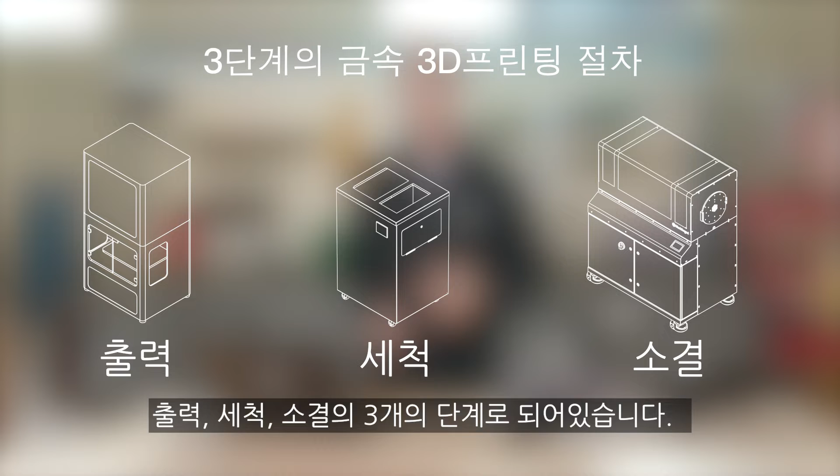First, let's start with CAD. You design your part, then export to STL and upload into Eiger. Eiger is a cloud-based slicing and print management system that comes with every Markforged product. This automatically configures your part based on the material and printer you've selected.

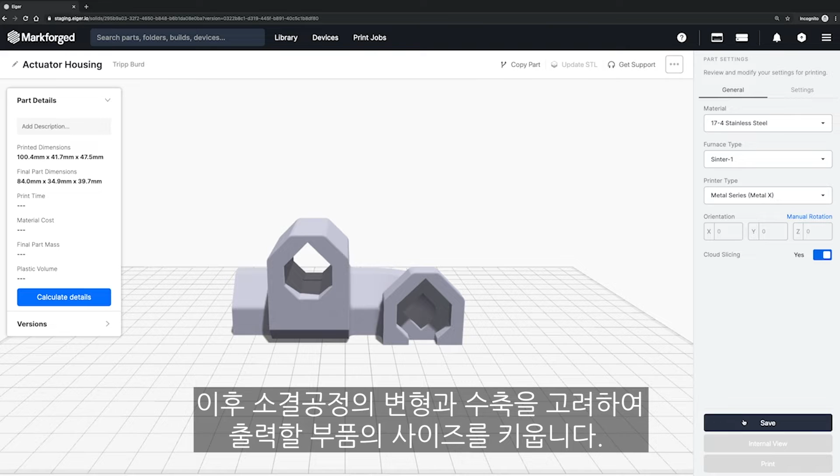When your part slices for metal 3D printing, it gets scaled up to account for shrink and deformation in the downstream processes. It then slices your part into discrete layers, identifies overhang features, and builds supports and a raft underneath your part. As we go through printing, washing, and sintering, Eiger will monitor the part's progress along the way. Let's start this print and go to the Metal X.

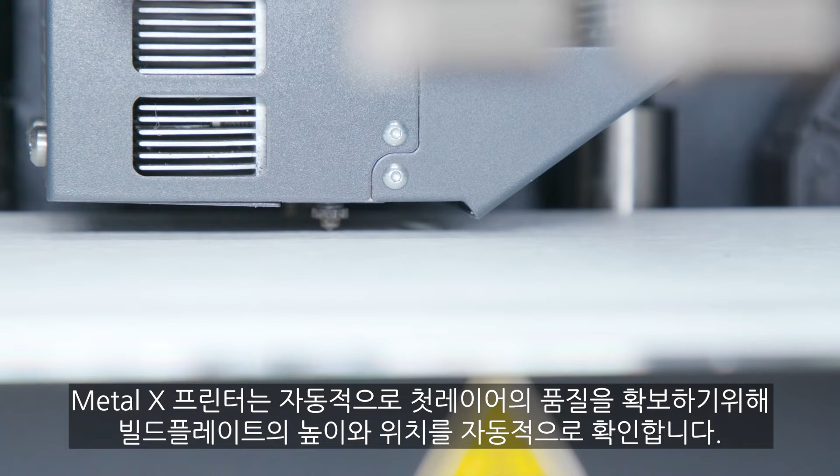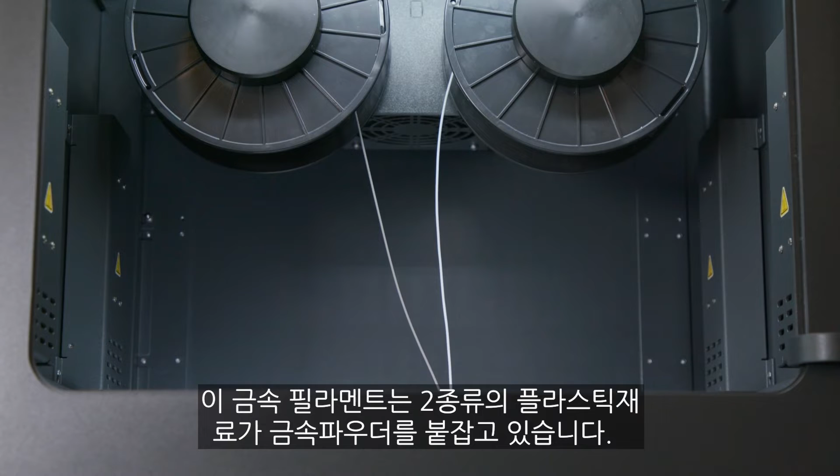Before starting a print, the machine automatically maps and levels the bed to ensure the first layer goes down well. Your print is built of 2 materials stored in this heated chamber above: one of ceramic release material and one of the metal to be printed. This filament material is metal powder safely suspended within a 2-part plastic binder. It gets heated and extruded onto the build plate where the part is created layer by layer.

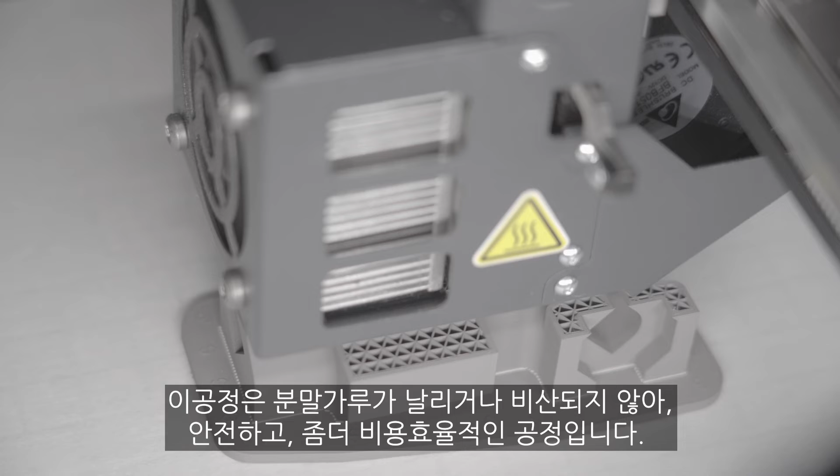The release material gets extruded as an interface between the part and its supports, so that once your part comes out of the furnace, it's easy to remove. Unlike other metal 3D printing systems, this process does not require loose metal powder, resulting in a safer and more cost-efficient workflow. 17-4 stainless steel is loaded now. However, with a quick changeover, the system is capable of printing in stainless steels, tool steels, coppers, Inconel, along with several other materials currently in development.

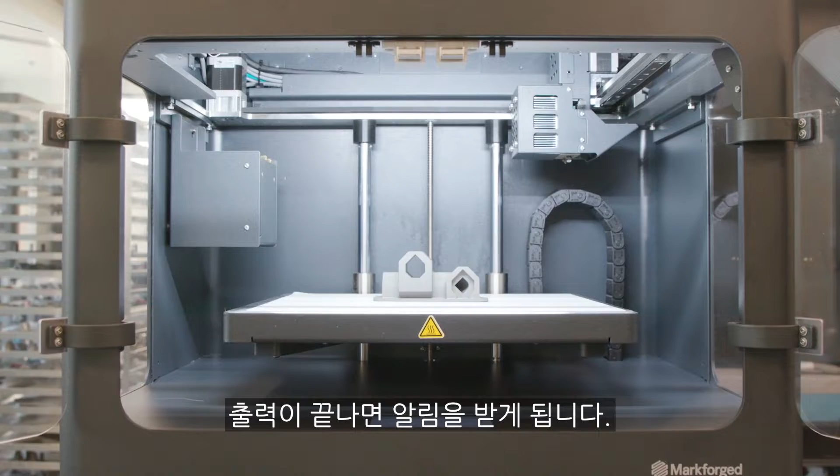Once your part is finished printing, you'll get a notification. At this point, you can go to the printer, remove the part from the build tray, and clear the bed. Now we have what's called a green part. It doesn't really look or feel like metal. However, a large part of it is comprised of metal powder. Next step will be putting it into Wash 1 for the debind process.

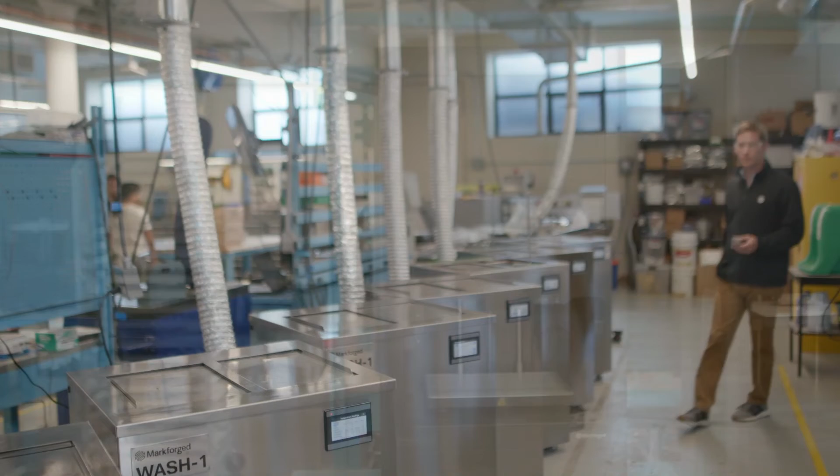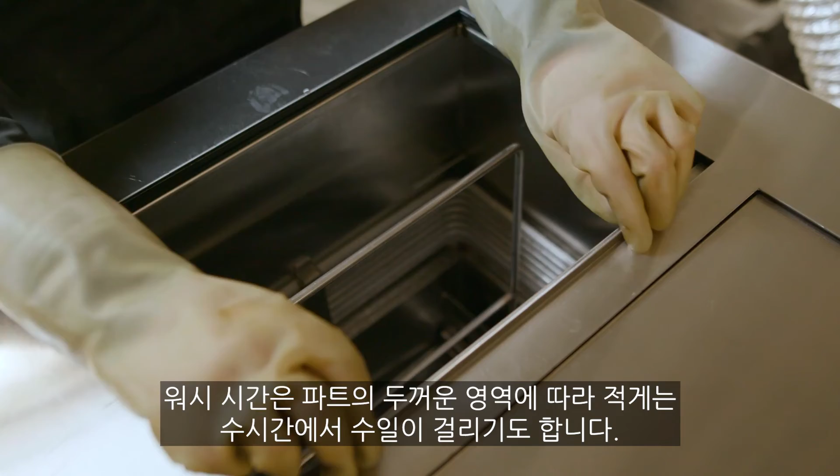The Wash 1 removes the first stage of the binding material. A green part is taken from the printer and placed into the wash basket, which is then lowered into the solvent. Wash times will vary, ranging from a few hours to a few days, depending on the thickest region of your part. After that, it's now called a brown part and is ready for sintering. Let's go over to the furnaces.

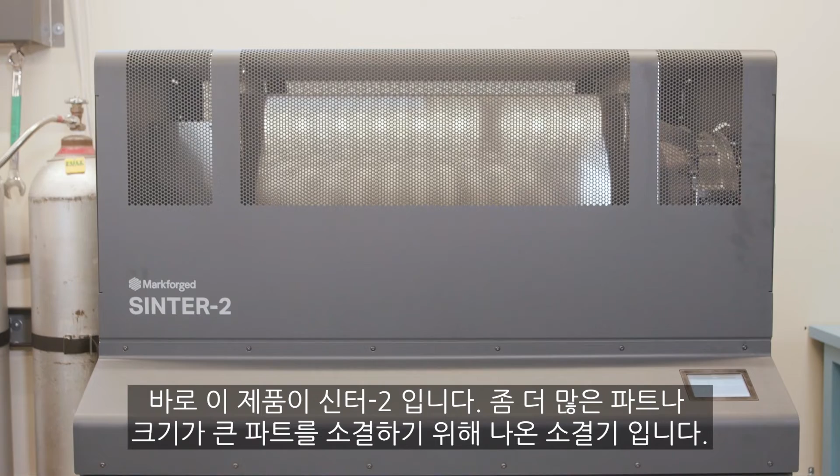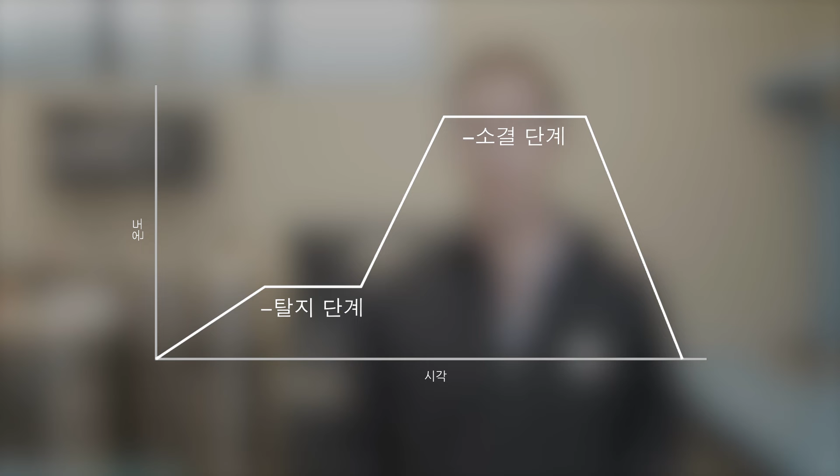This is Sinter 2, a furnace designed for mid-volume production runs and larger printed parts. Sintering transforms a print from a lightly bound collection of metal powder to a fully finished metal part. First, the temperature ramps slowly to burn away the trace amounts of remaining binding material. Then, temperature ramps closer to the melting point of the material, allowing metal particles to start to fuse together to create a strong metal part.

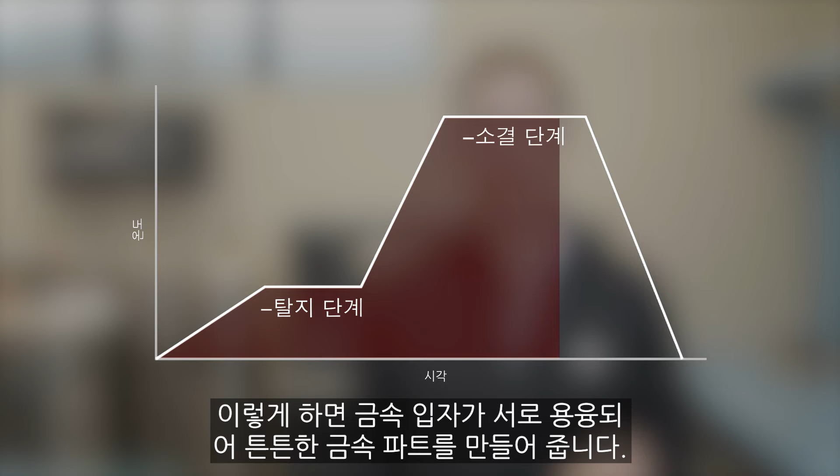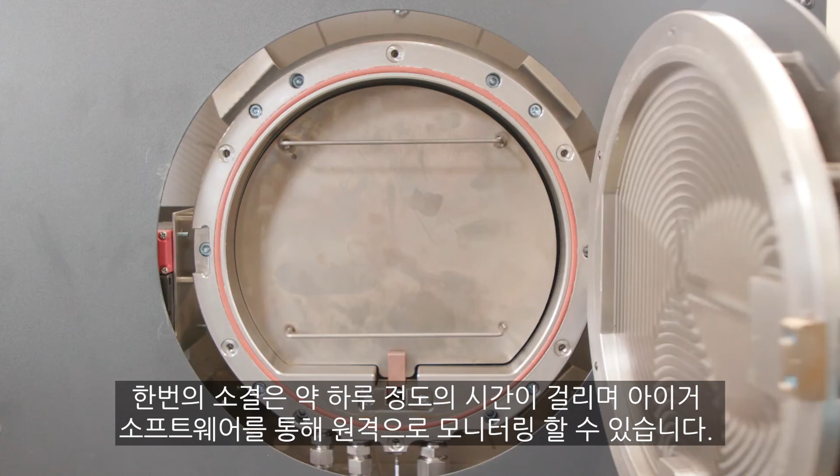Markforged sintering furnaces use a carbon-free retort to ensure part quality and alloy composition standards are met for our finished pieces. Each run takes about a day and can be monitored remotely using the Eiger software. Once a run is complete, the setter tray full of finished metal pieces can be removed from the furnace. Once removed from the raft, these parts are ready for use.

In the furnace, the layer of printed release material between supports and the raft and your printed part remains powderized. This allows the structure to be tacked to the raft to better control shrink and accuracy throughout the process, but also an easy release after sintering.

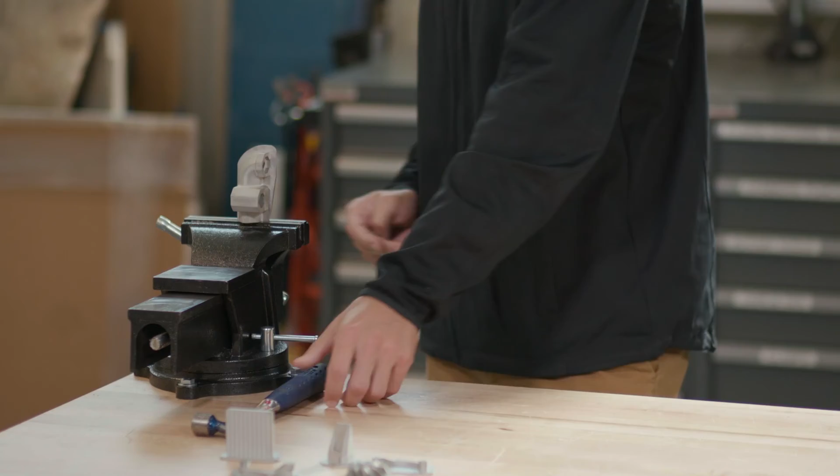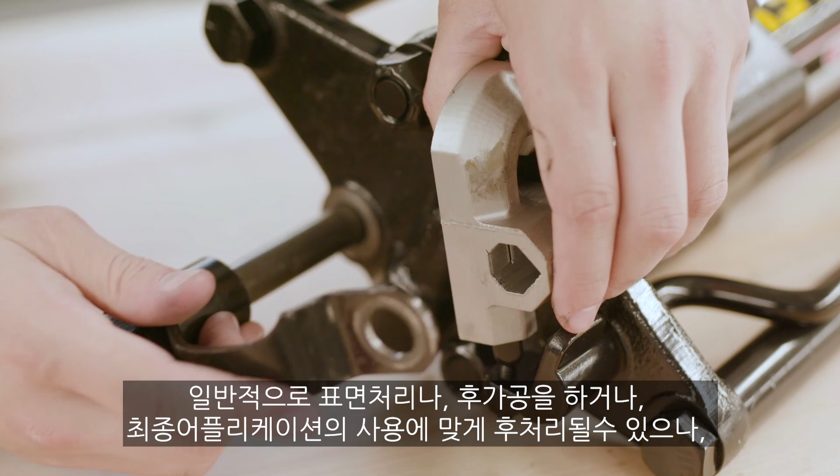At this stage, your part is fully sintered and ready to be used. It can be post-machined, polished, or otherwise processed as necessary for the final application, but in many uses, the accuracy and strength are good enough as is. It's ready for install.